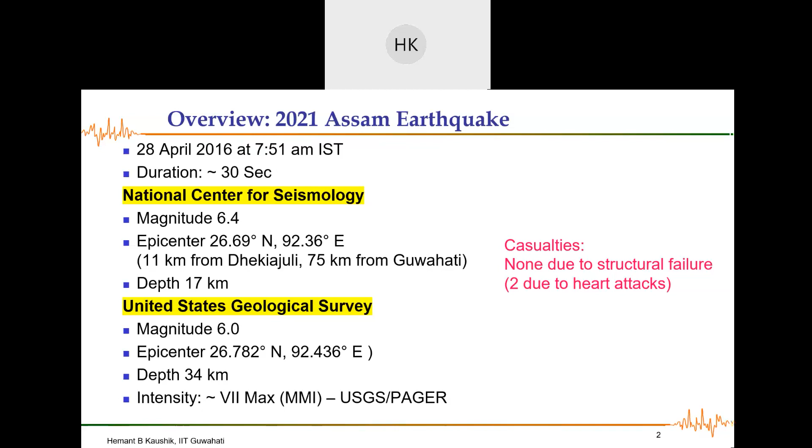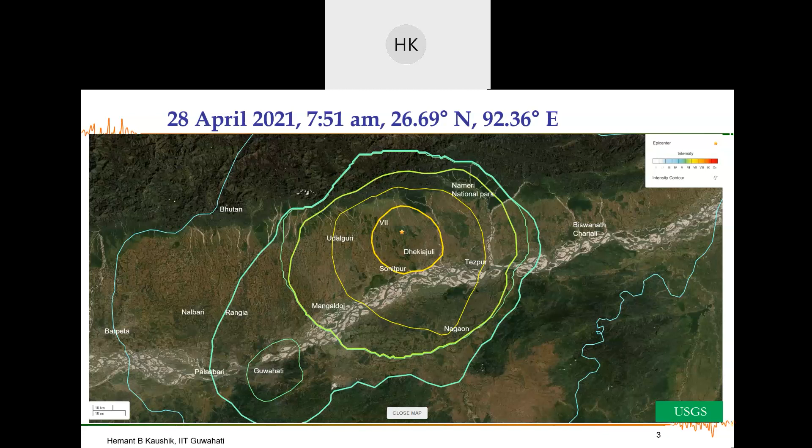All of you know that when you go towards the epicenter, the intensity increases. That means the expected damage increases as we move towards the epicenter. This is a map given by the USGS. The earthquake was felt not only in India, but in the neighboring countries of Bangladesh, Bhutan, China, and Myanmar. And there are reports from all over these countries, even Nepal as well, that people felt the earthquake shaking. Not only the main earthquake, but also some of the bigger aftershocks.

So 13 aftershocks were felt in just the next 3 days. These aftershocks were all of magnitude 3.0 or more. I'm not counting the aftershocks having magnitude less than 3.0. And yesterday also there was an aftershock that was felt even in Guwahati. Out of these 13, two were of magnitude more than 4.0. And even during these aftershocks, people were frightened. So these are the epicentral locations for these aftershocks, spread all around the epicenter.

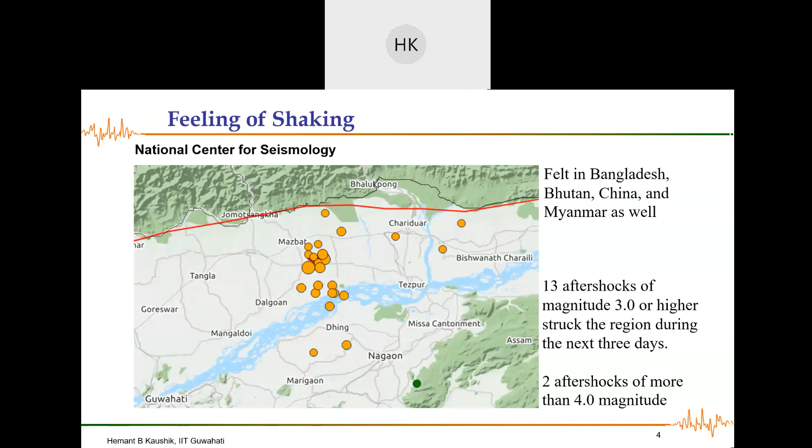Now, as soon as the main event struck, immediately we had two aftershocks. So the people who came out of their houses, some of them actually waited for a long time because of the shock, because of the fear. This is normal in case of big earthquakes of magnitude 6 and more, that we get so many aftershocks. In fact, some of the bigger earthquakes had even thousands of aftershocks after the main event. So this is quite normal. And we heard many stories, many news, many predictions that the day after tomorrow or tomorrow at this time we'll have a bigger earthquake. These are all rumors. We cannot predict earthquakes.

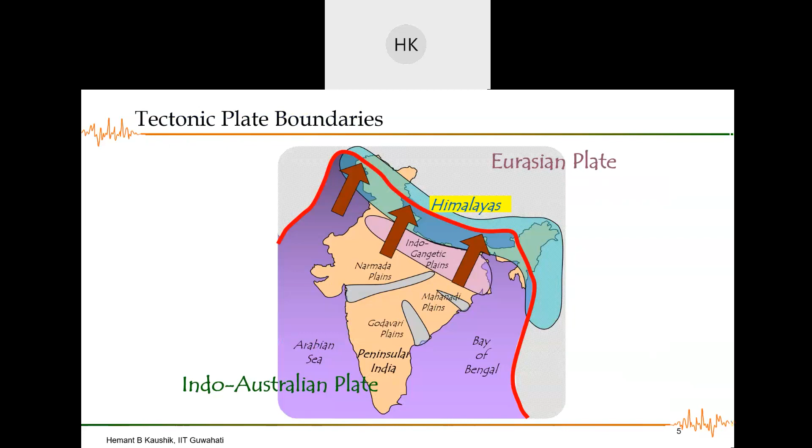We all know how and why these earthquakes are occurring. Our Indo-Australian plate is actually colliding with the Eurasian plate. Our plate is going down the Eurasian plate, and that's why we have the Himalayas along our northeastern boundary. And because of this subduction zone, there are many faults, there are fissures, because of which we have a very complex geological scenario here, and this earthquake is one of them.

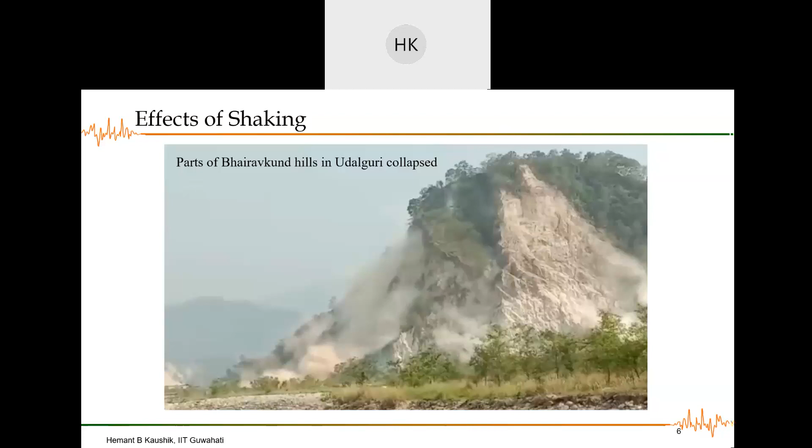What are the effects of shaking? Well, as far as the news reports are concerned, part of the Bhairavkund hills near Udalguri collapsed during the earthquake shaking. For me, this is the biggest damage that one could observe in this earthquake. Then there were big ground cracks and liquefaction near the epicentral region. Again, this is also a significant geotechnical issue that needs to be addressed. It has to be studied why such huge ground cracks occurred there, why liquefaction.

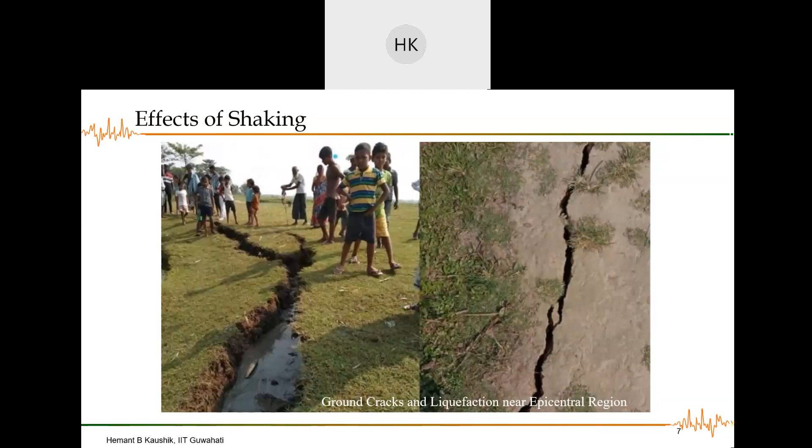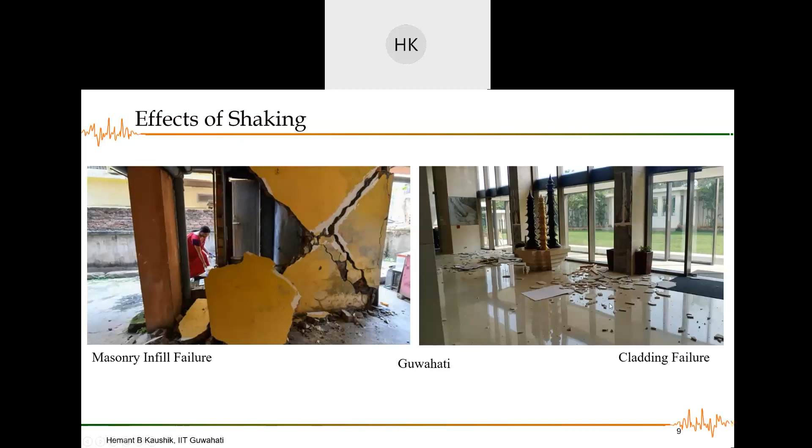Now, this building is about 40 to 45 kilometers from the epicenter. Not very far, but still, it is not in the mesoseismal region of highest expected damage. Then the other damages from this earthquake: you can see here the masonry infill walls failing, the huge crack in the infill wall, and then finally it collapsed in the out-of-plane direction. Then the famous hotel, all of you know these pictures, the cladding failed. So these are all non-structural damages. These are not my photographs; I've taken them from the news media.

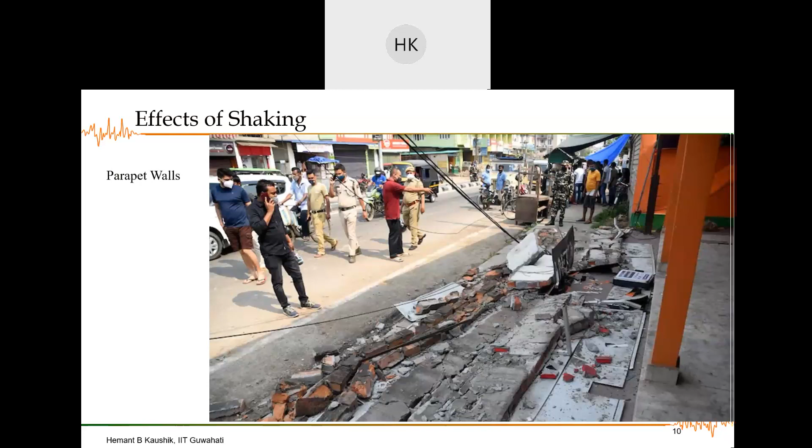The parapet walls, boundary walls, again masonry walls that fail in the out-of-plane direction. It is not very difficult actually to prevent such failure, but somehow the engineering judgment required to protect these walls was not there.

Masonry infill failure is a very common, much expected failure in any earthquake, even of smaller magnitude. The reason is very simple: these earthquake waves are basically energy waves, and this energy has to be transmitted, has to be dissipated somewhere. So these masonry infill walls dissipate the energy.

And if we can construct our reinforced concrete members properly, such that this damage in masonry does not result in damage in RC columns and beams, then we are safe. Then we are successful in our design. Now it is only a question of whether we are doing this correctly.

So this is a long wall, you can see, a masonry infill wall. And obviously in long walls, we always see such kind of shear failure. X types of cracks are very commonly observed. So here also, same building, you have the X cracking in the masonry infill wall.

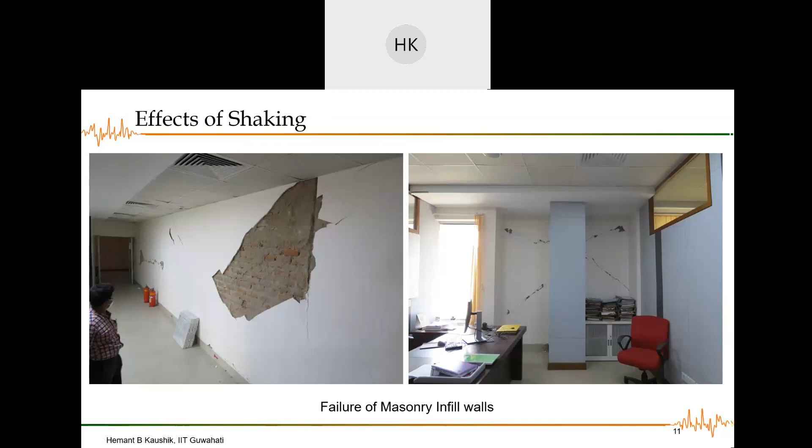Again, a long wall. And what you can see here is that there is a thick plaster on the walls. And not only the plaster, but above this plaster, there was a plaster of Paris. So we are actually trying to showcase as if the construction is really nice, the finishing is really top class, but what actually matters is not the top finishing, but the structure itself.

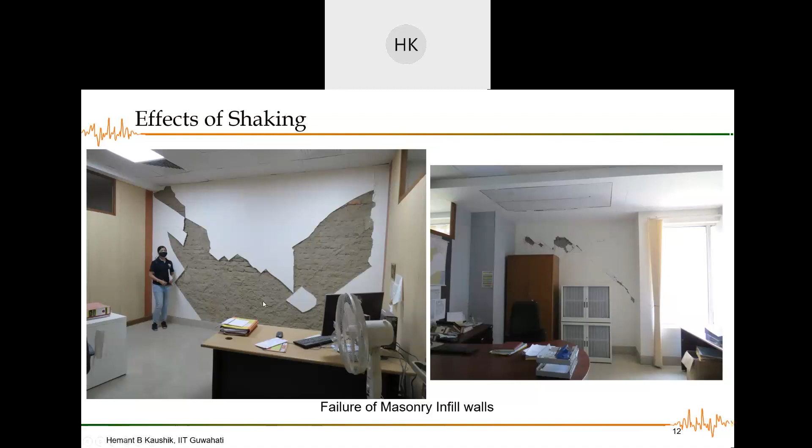So this is not a serious failure, but what I'm showing you is what kind of failure was there during the earthquake. These are all easily repairable. Again, the failure of masonry infill wall. So you can see how the energy is actually dissipated by these infill walls. So if properly constructed, if we can avoid the out-of-plane failure, if we can avoid such big removal of the plaster, then we can actually save the buildings.

Collapse of the false ceilings is another commonly observed failure during this earthquake. Hundreds of buildings, I could get reports that such false ceilings have failed. The primary reason was the construction was not proper. This was not a big earthquake where we expect such kind of false ceiling failure, but because of certain minor issues, the ties connecting these claddings to the ceiling were not proper. So this issue can be handled very easily.

Now, though it may appear to be a non-structural failure, just imagine the whole false ceiling falling down and someone is working in the cubicle here. Luckily, it was 7:51 in the morning. No one was working here, but otherwise you could have big damage.

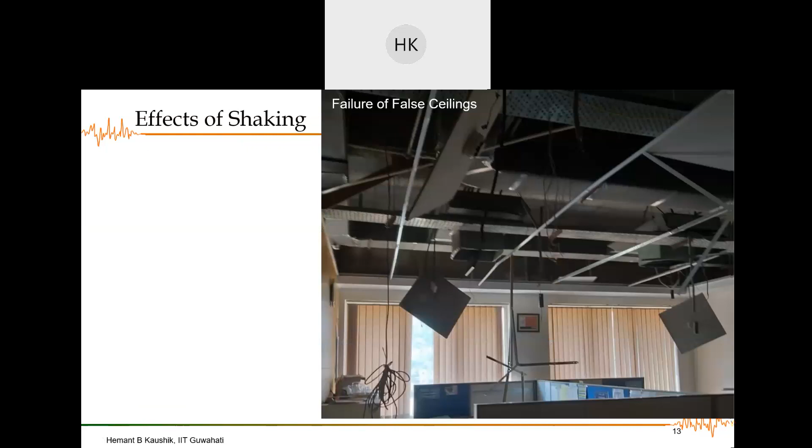Look at this non-structural damage. Now, was it so difficult to avoid? Can't we provide a suitable arrangement for this water purifier here such that it does not fall down? So this is what I'm mentioning. These are the damages that we can actually very easily avoid.

One interesting aspect is that during this earthquake, most of the reported damage was in reinforced concrete buildings. I have not read any news. Nobody has informed me that any damage has occurred to any other structure than the reinforced concrete buildings.

So there are certain questions that come to my mind. Are we designing and detailing these RC buildings properly? Are we providing masonry infill walls properly? Are we using the design codes properly? So these are some of the questions that our young generation have to think about before actually designing and constructing any buildings.

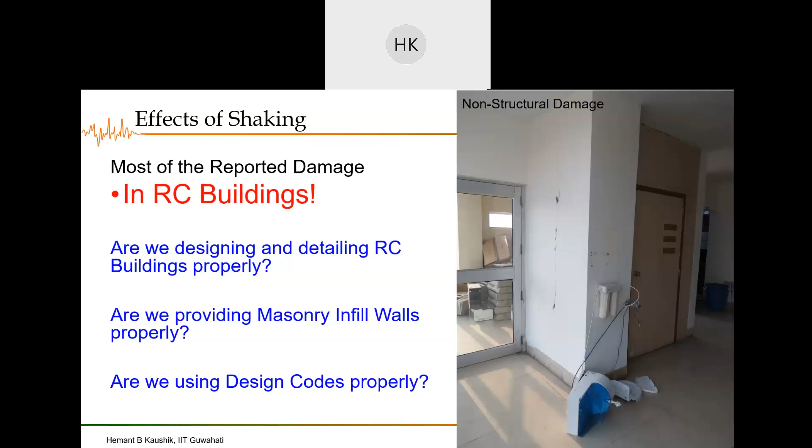So finally, there is a significant geotechnical issue that we have seen. There are huge ground cracks, the hills failing, liquefaction. So these issues are more in this present earthquake. Now, most of the reported damage is non-structural. The parapet walls, the boundary walls, false ceilings, these are non-structural, but that does not mean that they may not result in casualties. They can. We were lucky this time that the timing was such that there was no casualty.

Another major issue with such non-structural damage is that this takes a toll on the economy of the system. For example, some of the big buildings that I visited after the earthquake were shut because of such non-structural damages. People were not ready to go inside, and how can they when the whole false ceilings have fallen down?

So it takes a toll on economy. Even though there was no casualty, there was huge economic loss to many businesses. There was major damage to masonry infill walls, and minor cracking reported in some reinforced concrete members. Initially, there were reports of huge damage to reinforced concrete members in some buildings, but later it was clear that the damage was actually not in the concrete of these members, but in the plaster. Still, there was some minor cracking reported.

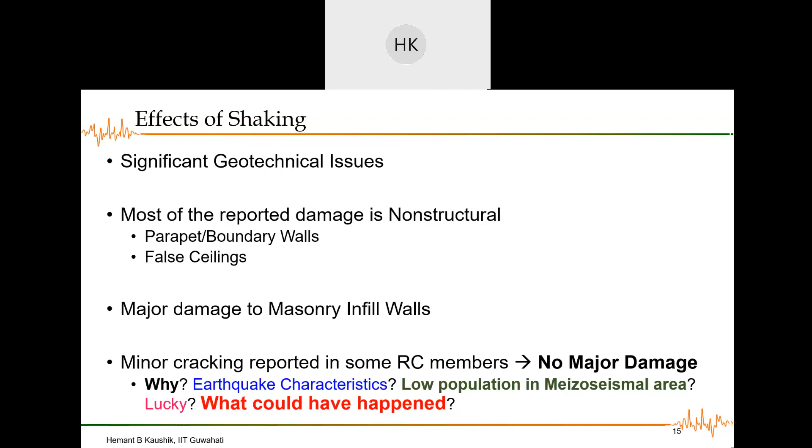Before that, we all know that the seismic hazard is maximum in this region. The entire Northeast comes under high seismic hazard, as per IS 1893:2016. Now, the maximum expected intensity in this region is 9 or more, so we have to design our structures for this intensity. And you can imagine what will happen when a big earthquake occurs, given that we are not even able to design properly for the smaller earthquakes.

Frequent earthquakes are expected in Assam, and we have been witnessing these smaller earthquakes. The smaller the earthquake, the higher the frequency; a bigger earthquake will have, of course, lesser frequency. So we expect bigger earthquakes, but not so frequently. This was one of those bigger ones, but as we discussed, there were certain reasons why the damage was not much.

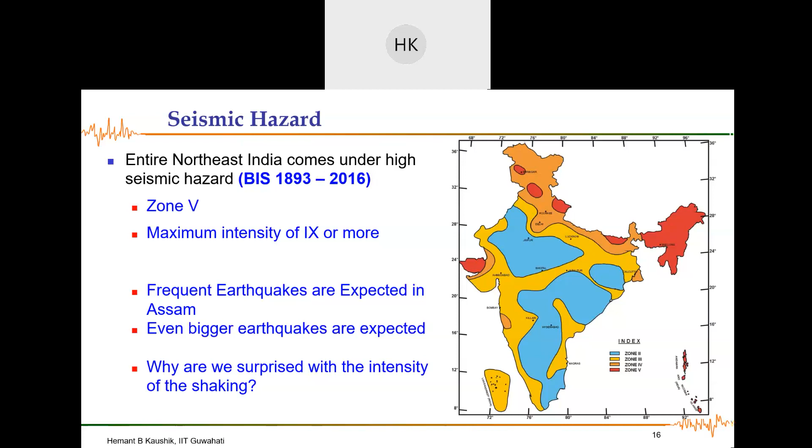Now, I'm surprised that people are surprised with the intensity of the shaking, but we should not be surprised, because this is expected in this region. So here we'll discuss what happened in the past, where we are in the present, and where we are moving towards.

Interestingly, more than 80% of the building stock in India presently consists of unreinforced masonry buildings. So when people say that we have reinforced concrete high-rise structures, we are only talking about maybe 10% or 15% of the structures in India - that's all. Most of our structures are unreinforced masonry buildings, 80% and more. So we are talking about semi-urban and rural areas here, where most of our population stays.

We somehow have a habit of using masonry in our structures. Show me a structure in India in which masonry is not used, and I'll be surprised. Why? Because it's easily available, it's economical, and it has many other advantages - it is strong, and it has good sound and heat insulation. So we can very easily use it in a variety of manners. That's why properly built masonry buildings have been performing well for several decades, but those masons are not here nowadays - now the kind of masonry buildings we are constructing are very poor.

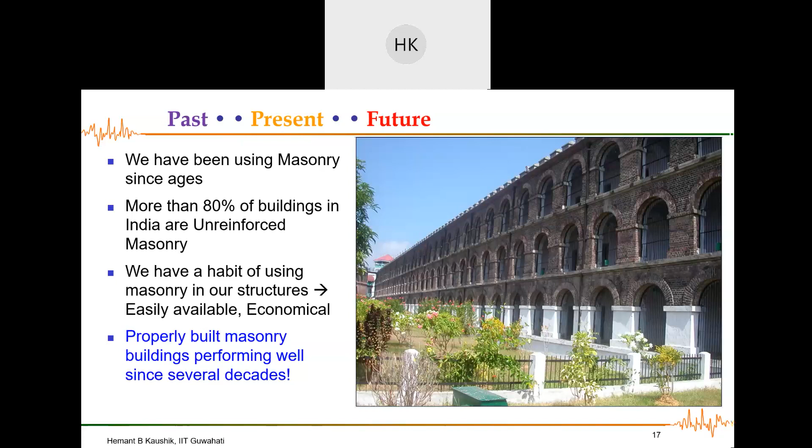Now where are we presently? We recently have developed an obsession with reinforced concrete buildings. Somehow all of us want to live in reinforced concrete buildings, right? And then, like I already said, we have a habit of using masonry. Then we use poor material to save some money. We don't use our design codes. So finally, what we get is our very hybrid type of irregular structures.

So this poor Superman here is trying to actually prevent the failure of these open ground story buildings. Earthquakes don't kill people, but unsafe buildings can kill people. So this is what is meant by here.

So these irregular structures are responsible for very high seismic risk in the region. And you can see so many irregular structures here. This photograph shows a very similar type of failure. The type of failure that the Superman is trying to avoid is shown in this photograph.

This is from Turkey, 1999 earthquake.

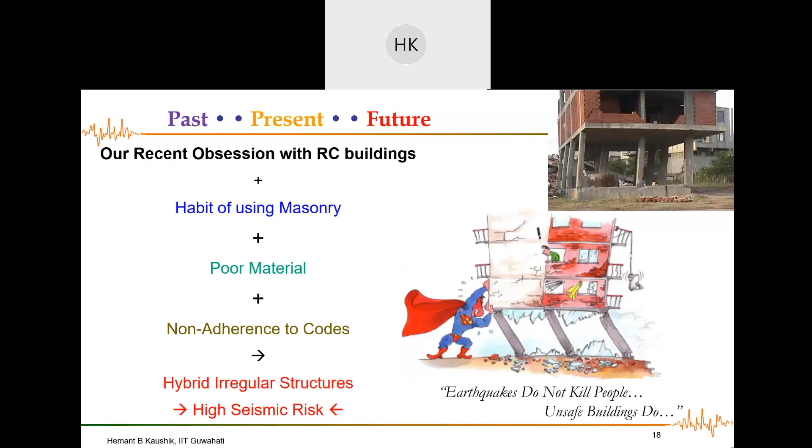So what do we do? Before we can even try and think what to do, let me tell you that we are not even able to design, detail and construct simple regular reinforced concrete buildings properly.

Now look at these examples here. Is this the way we construct reinforced concrete beams and columns? This is a recently constructed building, and you can see what I don't know whether you can call it honeycombing, because I don't see concrete at all.

Then you see here, these walls actually, before failure, have damaged the columns. So simple location of openings actually could have reduced this type of damage.

Look at this intermediate failure of this floor. Otherwise, the building is standing properly. So what to do with this building? There's no other choice but to dismantle this. So you can see here dismantling activity already going on, and the material debris is falling here.

Look at this building - regular building, not very tall, no open ground story, but it collapsed. So this is what I'm saying, that we are not actually designing our reinforced concrete buildings properly. We are not detailing them properly.

Can you see here in this building, in this 600 mm, there is no stirrup, right? And all of us know that this is the region where we expect the plastic hinge to develop during the earthquake, where we expect some damage. And there is no stirrup here, there is no shear reinforcement.

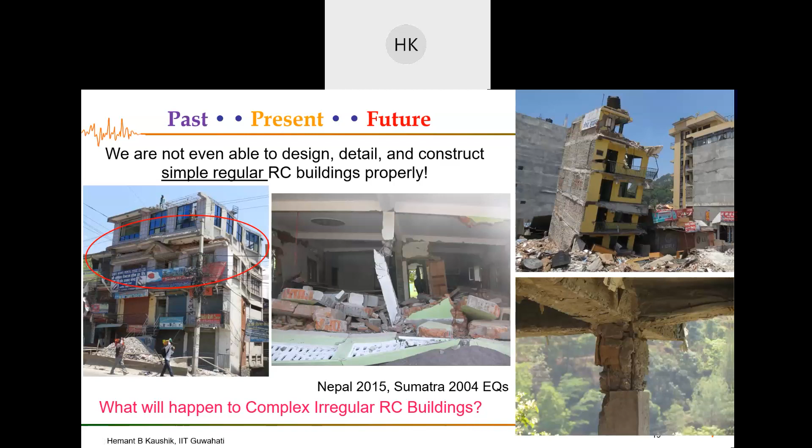Now, if this is the status of regular buildings, what will happen to the complex, irregular reinforced concrete buildings? Because all of us love complexity, all of us love irregularities. Let us see what happens.

So the biggest problem in Indian cities, in urban cities in India, are the open ground story buildings. This is the vertical irregularity that comes because of absence of the masonry infill walls in the ground floor. So if I apply a lateral load at the top of this building, you can see there are two parts to this building. The left part has open ground story building. The right part does not.

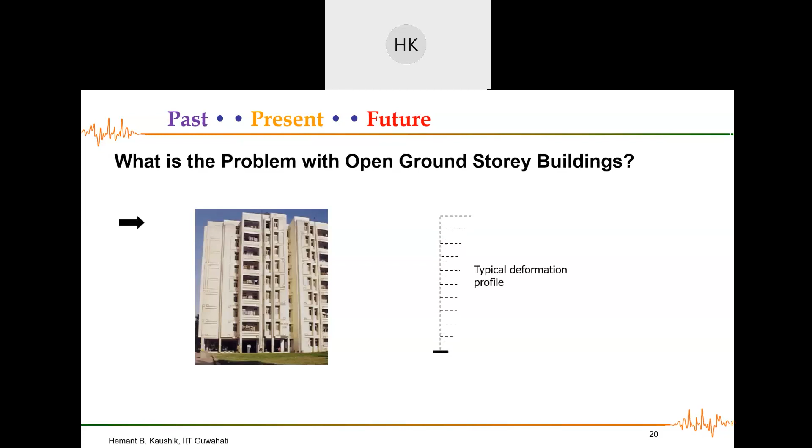Now let us see how this building is going to deform because of application of this lateral loading. So these are all the floors of this building, and I'll show you how typical deformation will be visible when I remove the masonry infill walls entirely. So now I'm assuming there is no infill wall anywhere along the height of the building. In that case, if I apply this lateral load at the top, I will get a very beautifully well distributed lateral deformation along the height of the building. So this is the bare frame.

So you can see here, if I take this displacement, relative displacement between these two points versus relative displacement between these two points, the inter-story drift ratio is more or less constant from top to bottom. And this is how our building should behave.

Now, if I consider this right-hand side building where the infill walls are there in all the stories, this is fully infill frame. And obviously, because of presence of these infill walls, you will find that the deformations will reduce, right? So from this point, it has reduced to this point.

And even then, the vertical deformation profile is quite regular. So the inter-story drift ratio, again, they're more or less similar when you go from bottom to top.

Now, a very interesting feature of this open ground story or open first story frame. So this building, the real building here, you can see that most of the lateral deformation is actually accumulated in the ground floor itself. The upper stories are not deforming much. They are more or less constant, slight deformation. But look at this deformation here.

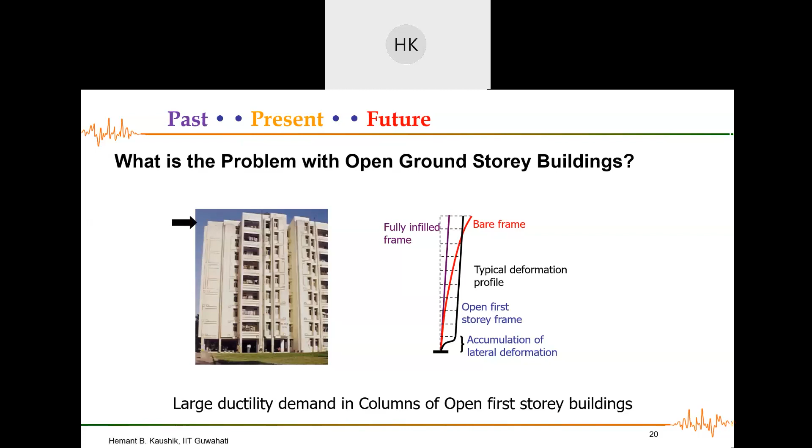And because of this problem, in every earthquake that has occurred in India in the last 25 years, such buildings have collapsed. So I'm showing you photographs from 1997 here. I heard this news, I did not visit this area, but then I heard the news. The team from IIT Kanpur visited, and when I joined my PhD in IIT Kanpur, I got this photograph. So 22 May 1997, a small earthquake of 5.7 magnitude, and we have this kind of open ground story failure.

2001 Bhuj earthquake, this is a famous photograph. All of you know about this building. It's 5-story, but now only 4 stories are visible. The open ground story has gone.

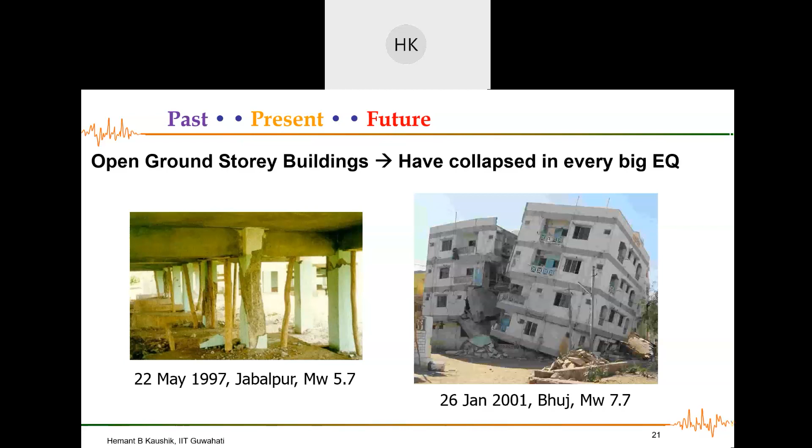2004 Sumatra earthquake. This building is only 2-story, right? And you can even see the car here. So the parking space which was constructed for this car, neither the car can be used nor the parking space now. And look at the building, look at the quality of concrete. Only a 2-story building and completely collapsed. This building was about 1,000 to 1,100 kilometers away from the epicenter. The epicenter was in Indonesia, Sumatra. But the earthquake was so big, 9.1, that the buildings have collapsed in Port Blair.

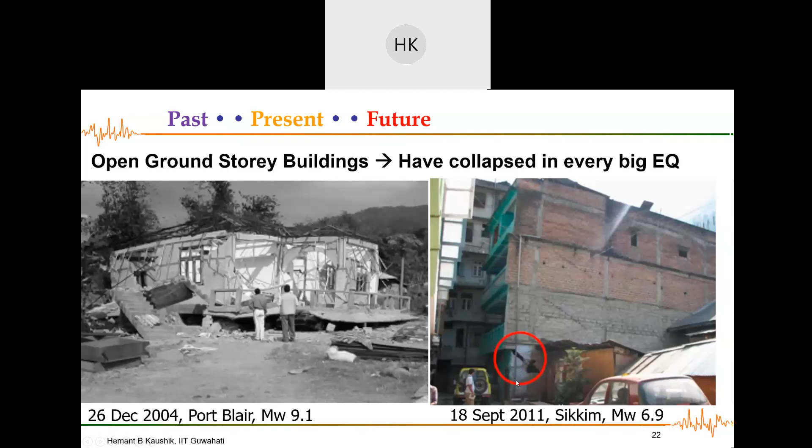2011 Sikkim earthquake. It was again a big earthquake, 6.9 magnitude, and you can see open ground story building failure here. So there were several such columns which have failed, but the complete failure of these buildings was avoided.

2015 Nepal earthquake, again a big earthquake, 7.8. So this building collapsed. Now, though it is an open ground story building, that was not the only reason why this building collapsed. There were other reasons because of soil subsidence, because of the sloping ground. So there were many problems here.

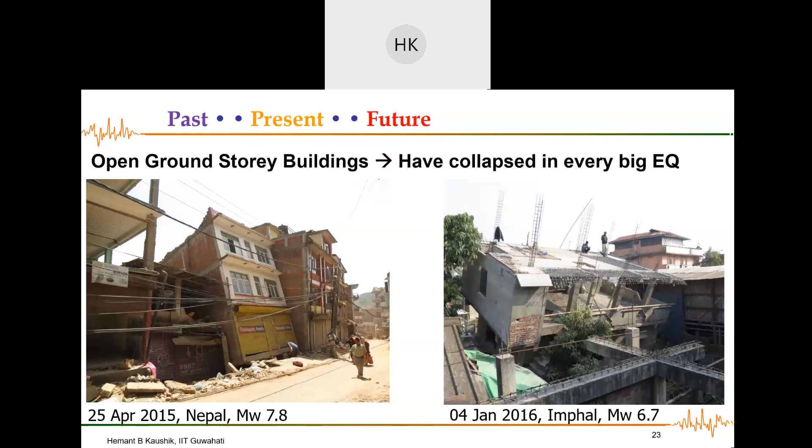2016 Imphal earthquake. This was not even a completely open ground story building. It was a partially open ground story building. And you can see when such failures occur, there is no other way to retrofit or to strengthen this building. You have to dismantle it. You have to completely remove the building. And this dismantling will take a lot of time, effort, and money.

Now in Assam, we have thousands of open ground story buildings, and there were reports that from about 15 to 20 buildings, some damage was there in these buildings in Guwahati city, only Guwahati city I'm talking about. But some engineers, the Assam State Disaster Management Authority, and some local engineers, they have actually tried to improve the size of the columns by jacketing. But I have myself not seen those columns, I've only heard about them.

Now, these are some of the common problems that we can think of. So first, it is the irregularities in the structure. Most importantly, the vertical irregularities, the open ground story buildings, but also the horizontal irregularity, the irregularities in the plan related to torsion. Those are also very severe.

Non-involvement of engineers, this is a big problem in India, not only in this part of our country, but everywhere. I can cite you one very interesting story of my PhD student whose parents were constructing a house in Guwahati city. And then when this student started giving them advice about ductile detailing, about the sizes of the columns, they started not discussing the issue with the student, right?

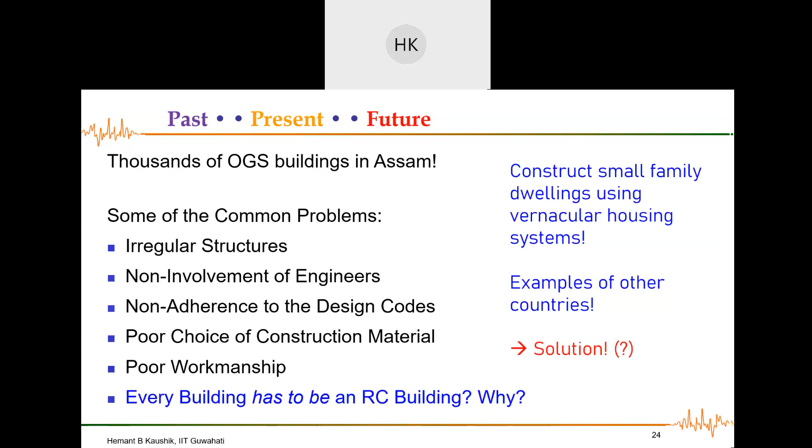In California, which has some of the highest seismicity in the world, you will not find a single family house constructed of reinforced concrete or even structural steel. Almost all houses in these seismically prone areas are wooden houses. In Japan and New Zealand too, you will find most houses that individual families build are not reinforced concrete.

So are these the solution to these problems? Let us see. Because of limited time, I will shortly discuss two vernacular housing systems. The first you already know - it's such a famous typology, not only in Assam but in the entire world. People really appreciate the kind of connections used in these houses, and the type of material used in these houses. I'll show you some details later.

Before that, when I joined IIT Guwahati, I started working on a project, and with the help of my MTech student, I wrote a very simple World Housing Encyclopedia report on these Assam type houses. You'll be surprised to know that this report has been downloaded by about 10,000 people in the entire world, which is surprising because people are still interested in learning how different vernacular housing systems are constructed in seismically active regions. But somehow we have forgotten such buildings.

We have moved from these buildings to other types of structures because of our obsession with other materials. There's no problem with that - we can be obsessed with some material, we can move to some other material, but then we also have to learn how to use that material properly, how to design them. We are not somehow doing that. The second type of houses we will discuss today is confined masonry houses. Some of you may already know what confined masonry houses are, but for those who don't, we will discuss it in brief.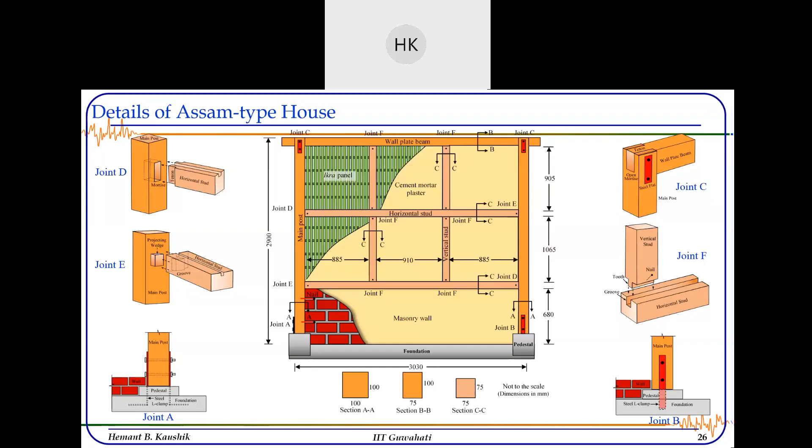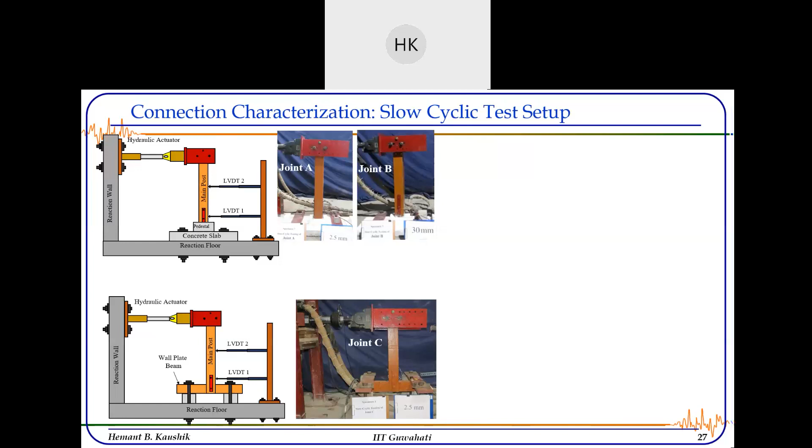So we carried out a lot of tests on these individual joints, all joints A, B, C, D, E, F. Every joint we tested, every member we tested, and then we also tested the whole house of this Assam type building. This is a single story, single room house which was constructed over the shake table at IIT Guwahati. In a single day we applied about 112 ground motions on this house specimen, and you will be surprised to know that even after application of these 112 ground motions, there was no damage at all to this house.

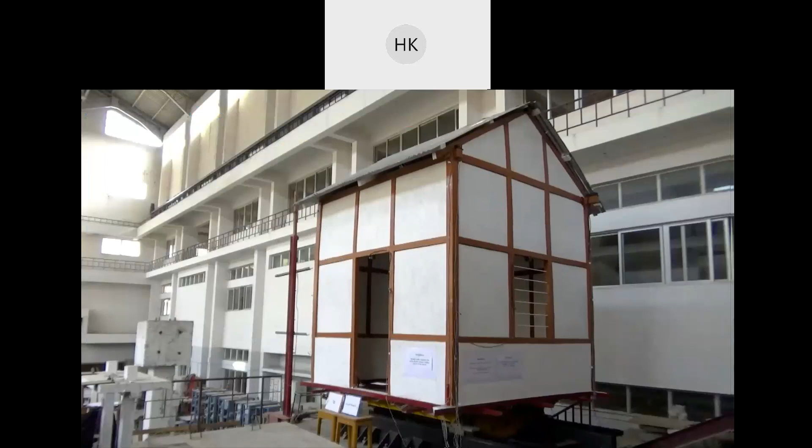I hope this video works here. Let me see. Yeah, so this is the Taft ground motion, the peak ground acceleration was about 1 g. You can see it's not a very small earthquake, peak ground acceleration of 1 g is a big earthquake. Some people say that the peak ground acceleration of the 28 April earthquake in Assam was about 0.1 to 0.15 g only, so this was about 10 times higher.

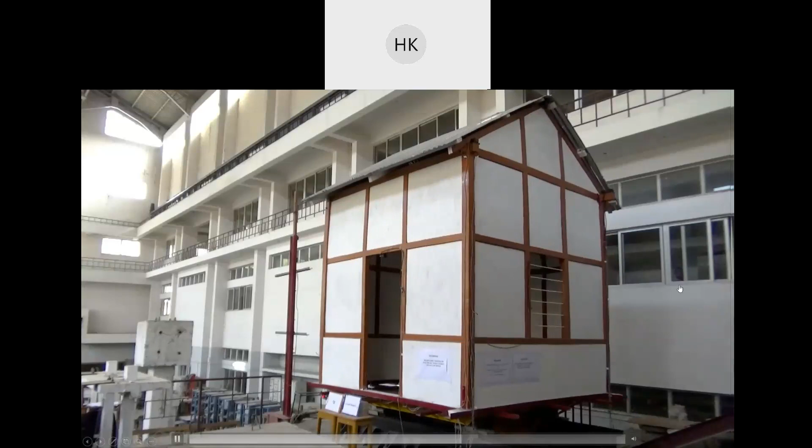And the student who did the test is standing here, Biswajit Chand. He has completed his PhD on this topic. Now even after subjected to this big earthquake, you cannot see any damage here, right? And why should I show you this video? Because you all have seen these Assam type houses since so many years, and you know that there is no damage to these houses even during big earthquakes, right?

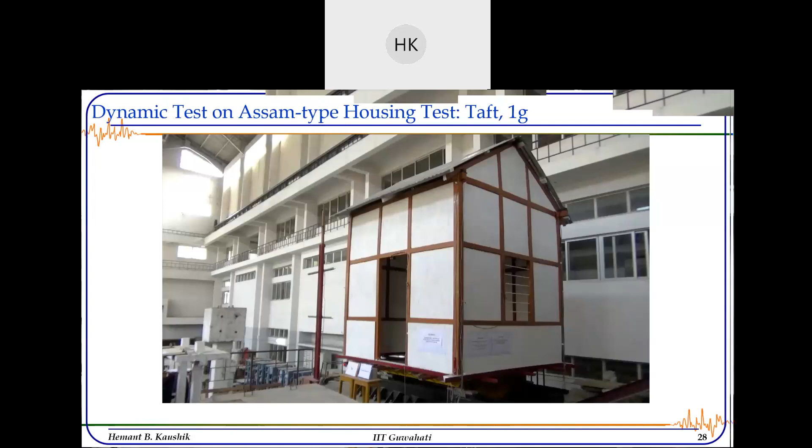So this is just one shaking that I'm showing you. We applied 112 such shakings, and we could not fail this house. So what we decided at that time, the student was really disappointed because he wanted to fail the structure.

So what we decided then, we will push this structure and pull this structure on a different test setup and try to fail it. So this is another setup where the same house we shifted at IIT Guwahati lab, and then just see here we are applying the push and pull load. This was applied by about 250 plus minus displacement.

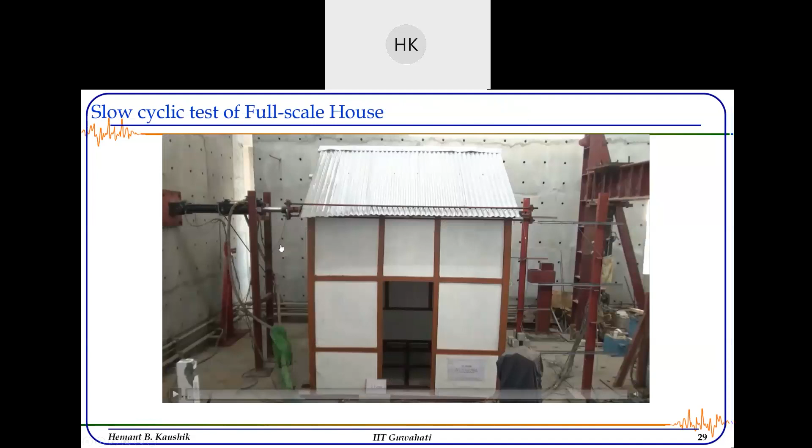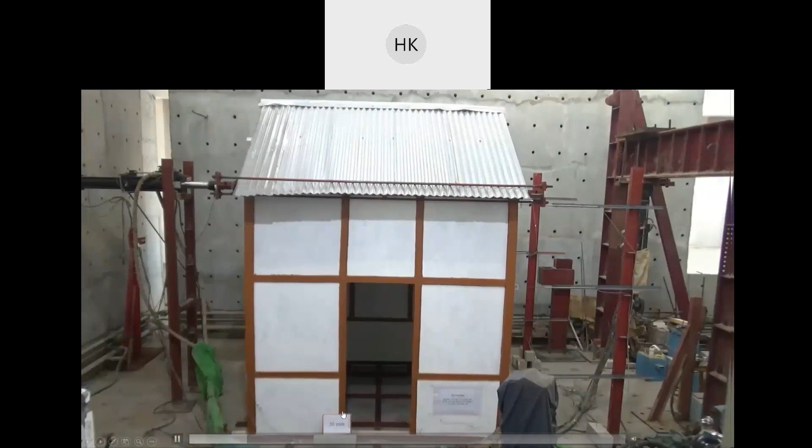So you can see what happens to these joints here, these are all flexible, right? And you can see here the displacement that we have applied at the top, we have already applied about 30 mm displacement. This test is I'm showing you in a very fast forward manner, not real time, because real time taken during the test was about 2.5 to 3 hours, but I'm showing you it in about a minute.

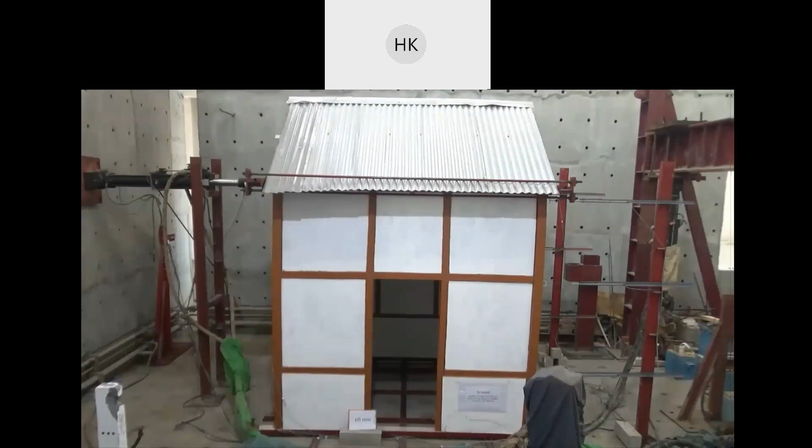So this is about 85 mm, which is huge actually, and you can see the separation of these ekra panels from the surrounding frame. You can see here the separation of this joint. Every joint actually is so flexible that it is simply separating, but then it is also going back there.

We have already reached 150 mm plus minus displacement here, which is again very huge displacement. You can see here now slightly the ekra panels, the bamboo shoots inside this plaster, and you can see the groove and wedge arrangement here, which is separating but again joining. We reached 220 mm, and remember such kind of displacements are not seen during earthquakes. So 240, 250 mm displacement, and we could not fail the structure.

So then we removed such kind of arrangement. We provided another arrangement in which we pushed this structure on a single side by about 500 mm. We did not pull it, we simply kept on pushing it. Then we could actually fail some of the walls. So 500 mm displacement is not less for a single story structure.

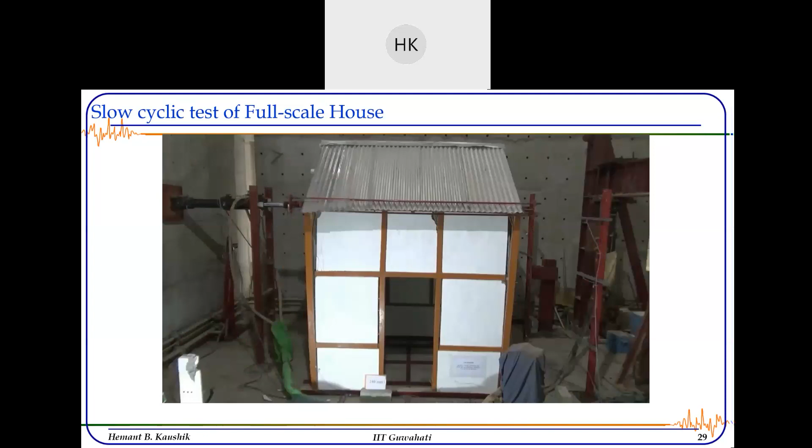Right. So all of us have seen such beautiful behavior and performance of Assam type houses. Let us see some of the behavior of these confined masonry houses. But before that, for those of you who don't understand what confined masonry is, here is the difference. There is a difference in the construction process.

So in confined masonry, we construct the walls first. So there's a foundation, and then we construct the wall. After that, we construct these tie columns and the tie beams. In reinforced concrete, we construct the RC frame first, and then the infill walls. The load transfer arrangement is different. We'll discuss this; the structural system becomes completely different, and there is a lot of saving in the cost if we are doing confined masonry.

Now, you look here, if we have the reinforced concrete frame with infill wall, this masonry wall is not designed to carry the vertical load, and we don't bother whether it carries lateral earthquake load or not. So the only reason this infill wall is there is to fill this gap. Otherwise, it has no structural design. It has no meaning otherwise. So we are simply wasting this material.

And without knowing that, during the earthquake, this masonry wall actually resists a lot of load. And since we don't realize that, we don't design them properly. And that is the whole problem. On the other hand, if you consider the confined masonry wall here, we design this wall to resist all types of loads: the vertical load coming from the upper floors, the lateral load coming from the earthquake. So this wall is expected to resist all loads.

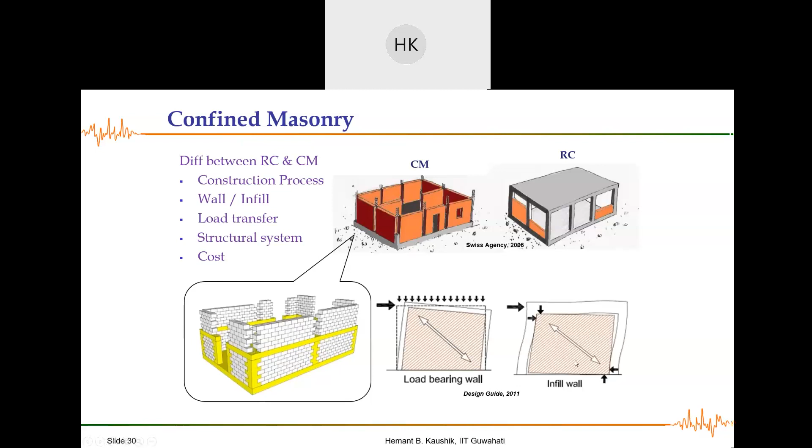So toothing means you can see here the individual layers of these bricks. So they are going inside. The concrete is going here into the wall, right? Such an arrangement increases the bond. Okay, so this is a very simplified system compared to the masonry infill RC frames, but the performance is comparable. And why is it comparable? Because we are using the materials to their capacity. We are wasting infill here, but we are not wasting here.

Let us see what we have done. We did a similar study like we did for Assam type housing. So this is how we construct these houses. I'm showing you this construction for a specimen with aspect ratio 2.0. So this is a very slender specimen. And you may argue, where do we find these slender walls? Well, like I said, the primary objective in confined masonry walls is to reduce the free span. So I'll show you some photographs where, because of the presence of walls and openings, you may have such slender wall specimens.

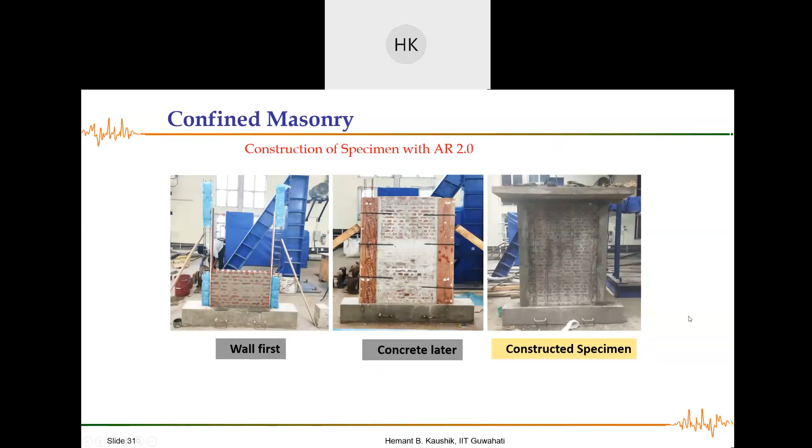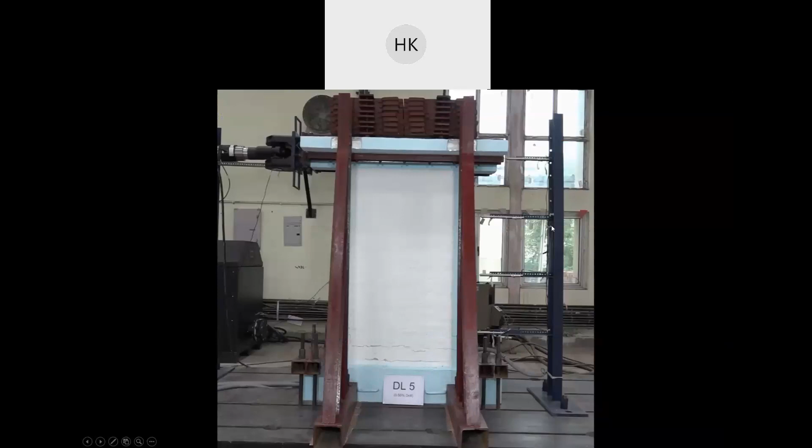So walls are constructed first. Concrete is poured in the tie columns and tie beams later. So this is the constructed specimen, and we did testing. Let me see if you can see the video here. This is a half scale specimen, a very similar arrangement where we apply the lateral displacement using these actuators. And here you can see the lateral drift that is being applied.

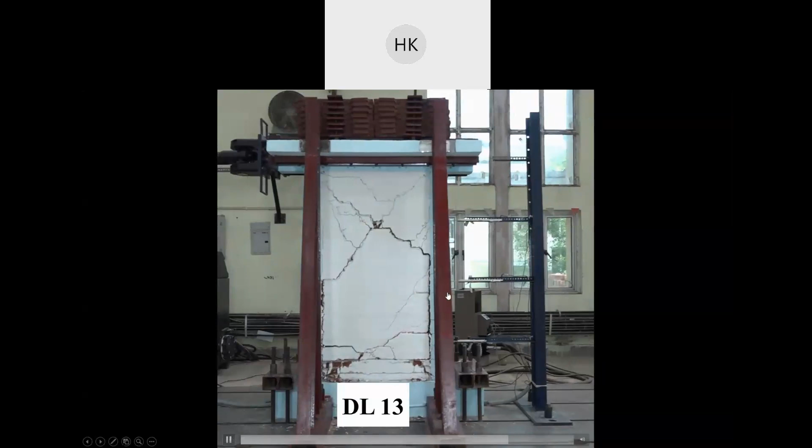And you can see how the cracks are forming in the masonry. And like we already discussed, these cracks actually form because of dissipation of the energy. Okay, so this is where, because of sliding, because of the interaction between the frame and the masonry, the energy is dissipated. So you can find at drift level 13 some failure in the masonry, failure in the tie columns as well.

Okay, so from a distance, it appeared to be a very similar construction like masonry infilled RC frame, but their behavior is completely different. Even their design is completely different. Here we design the masonry wall, but in case of RC frame with infill, we design the RC frame. And rather, I'll say we misdesign the RC frame. We don't do that properly. So that is why this system is coming up. So if you don't want to design the reinforced concrete properly, then let us design confined masonry. Let us construct confined masonry walls.

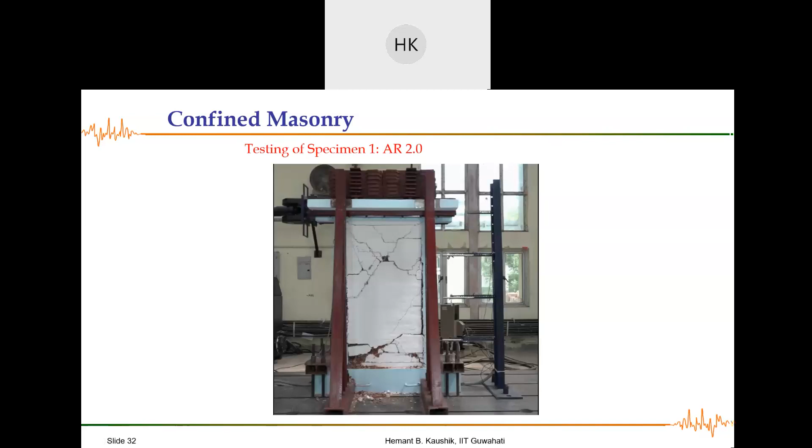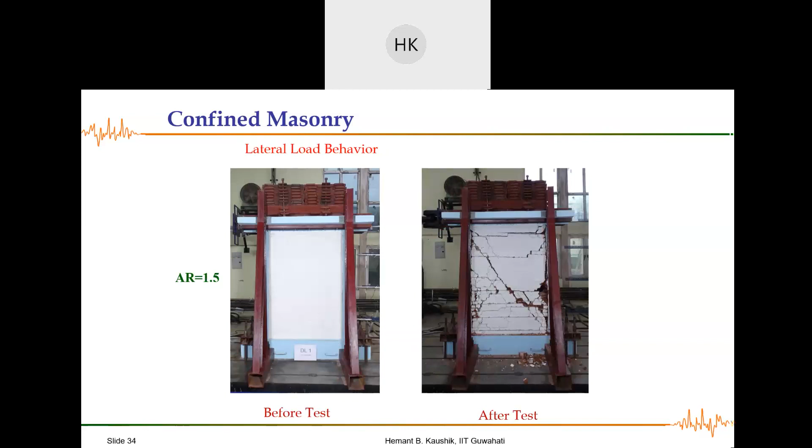Now, interestingly, this work was carried out by your own alumni. Bonisha Bora is a 2014 batch from Royal Global University. She is doing this work and she has almost completed her PhD now. Within a few months, she will be able to submit the thesis.

So the whole point of discussing all this is these are very simple systems and these have been proven to be performing really well during earthquakes in several countries. For example, Chile, in which big earthquakes are really common. There are thousands and millions of such buildings which have performed really well during the earthquake.

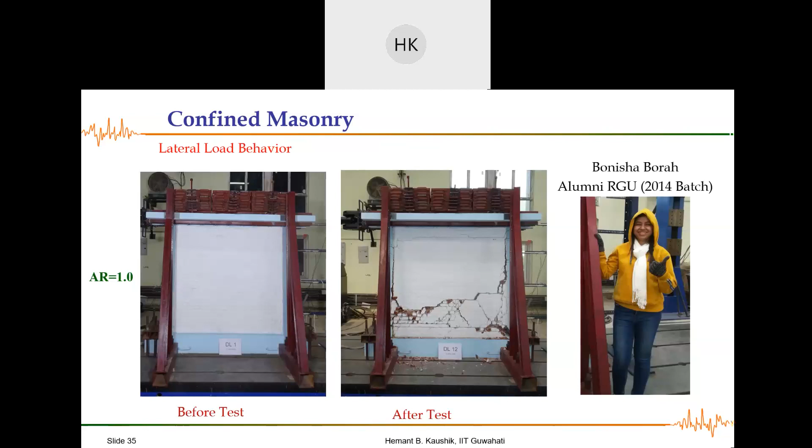In India, we construct these buildings, but without realizing that these are confined masonry. So some little things that we can do to improve the system, we are not doing. But once we realize that these are confined masonry buildings, we can actually improve the system. Fine, then I've shown you two solutions that we can adopt, at least for smaller buildings. So in summary,

the problems that we discussed are not specific to Assam only. But then this is not something that we should feel happy about. That it is like मैं तो अकेला नहीं मरूंगा, सबको लेके मरूंगा, right? So this is not something that we should be feeling happy about.

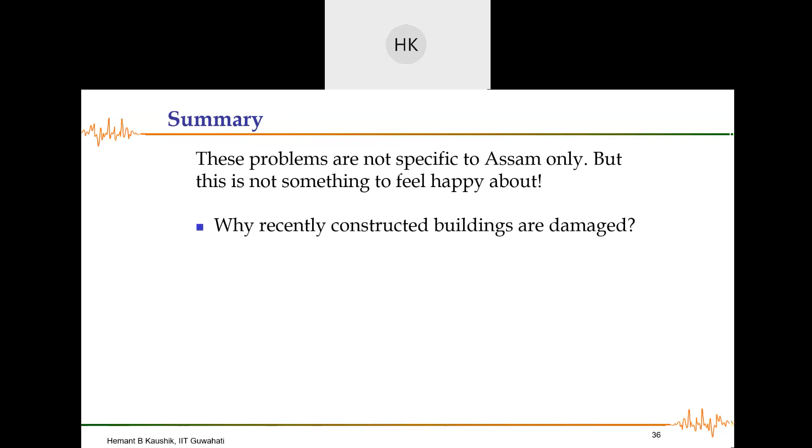The main question is why recently constructed buildings are damaged during earthquakes. And you will find hundreds of stories where people will say that old buildings are performing well, but the recent buildings are performing poorly. So of course, it has something to do with poor material, with poor workmanship, with poor labor, and with poor engineering judgment.

Look at this building. It was constructed in 2015, and within a few months, the Imphal earthquake struck, and these people had to demolish this building completely. It was a hostel building for the Sports Authority of India, and people were staying during the earthquake, 6.7 magnitude earthquake. So huge damage to this building. Of course, it could have been retrofitted, but then the government decided that they will dismantle it within a few months of construction.

Again, another open ground story, four-story building, Imphal. Immediately after construction, and you can see here that the construction was actually in progress in the top floor. But there was huge damage here to several columns during the earthquake shaking. And you can see what type of construction is there. So here you can find that this is the beam, these are the columns.

And because of some funny reasons, people actually make bigger rooms on the top because they think that here they can save some money, some FSI criteria, which I don't understand. And then when they go up, this area is further increased. You go up, this area is further increased. So as you go to the top, you have reverse pyramidal structures, right, which is very interesting. And you can see what type of opening is here, what type of opening is here, completely different. Here they constructed an opening without even understanding what can happen to this building.

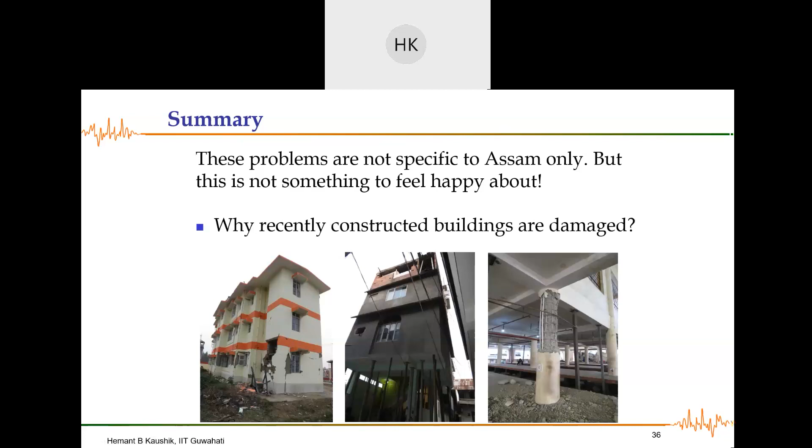A very simple market building, the famous Ima Keithel market in Imphal, and huge damage was suffered, and it was also a recently constructed building.

So why workmanship is so poor? Because we want to save money. Why seismic codes are not being followed? Because of course we want to save money, we want to save time. We don't have skilled people who can actually understand the codes.

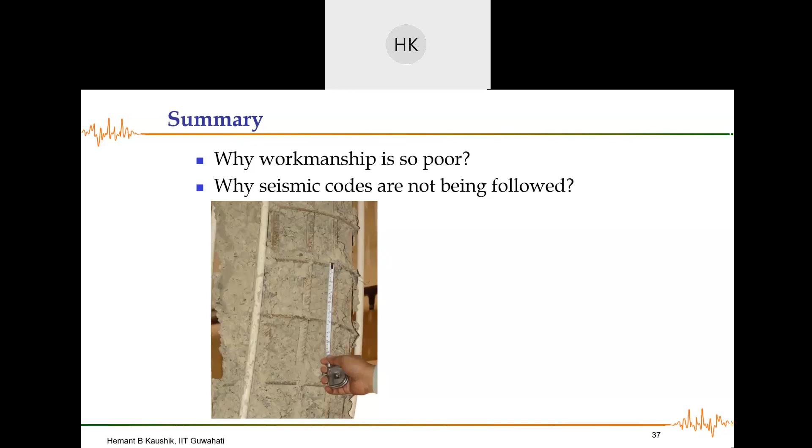And this is what we do then in seismically active areas, in seismic zone 5. If we are providing the spacing of the stirrups at about 150 mm, then we expect damage. There is no way we can prevent the damage. Look at the clear cover here, a clear cover of about 125 mm. Of course, there will be damage.

Then we have found some very great ideas that people use for having some scope of future construction. They leave such kind of bars, right? And you can imagine what will happen to these bars during change in the weather pattern. They all will be corroded in just one cycle of the weather.

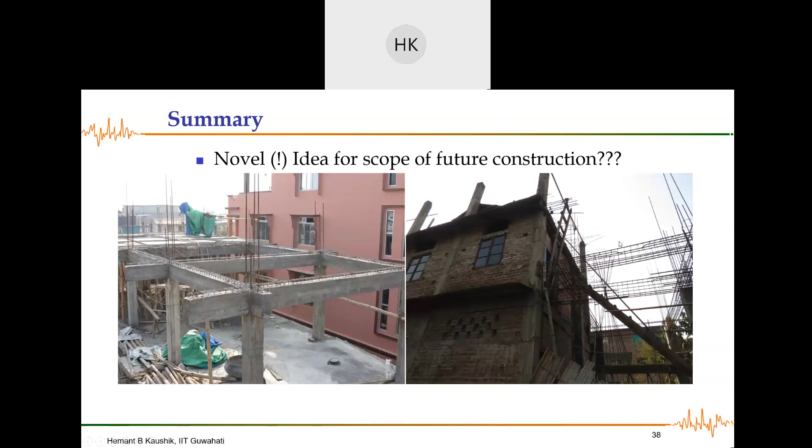And even greater ideas that they provide even the complete reinforcement detail bars, the cage, and they construct later. I'll show you this photograph here. This part of the building. What was done here is that this joint was not there originally. And it's very obvious because you can see the beam column joint is here.

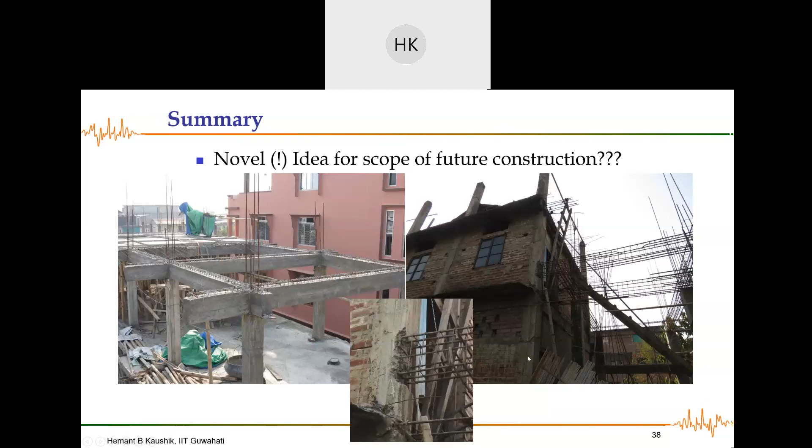But then the owner wanted this beam here. And the only way it can be done is by exposing the main bars of this column and then connecting these bars of this beam to these columns. What a great idea. And then they will say that their building has failed, has fallen during the earthquake. What else it can do?

When will the chalta hai attitude end? Then will our buildings be safer. How that will happen, I don't know. But then here is a very interesting example of how we are obsessed with beautification, with beautiful look of the structure. The drain water pipeline has been provided inside the column. You can see here, this is the PVC pipe which is provided inside the column.

So it is such an important idea to have good aesthetics, right? That we even are ready to sacrifice the quality of the construction, the strength of the structure. We don't bother about it, right? If you go to any developed country, you will not find any plaster, right? But here we are very fond of plaster because we can actually show that the construction is really polished because our real structure is not polished.

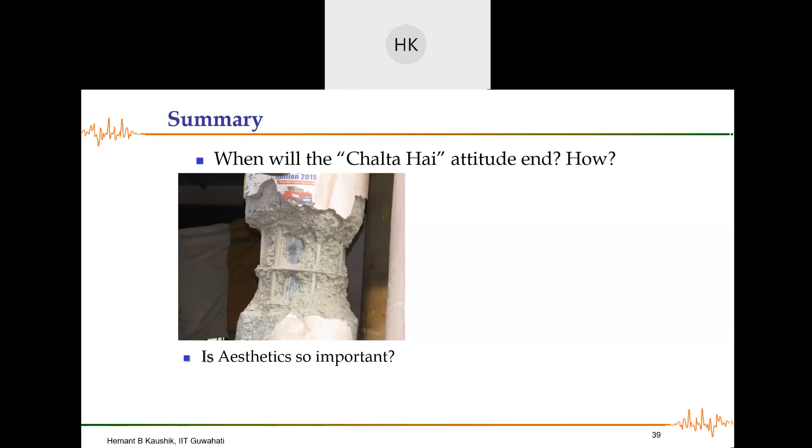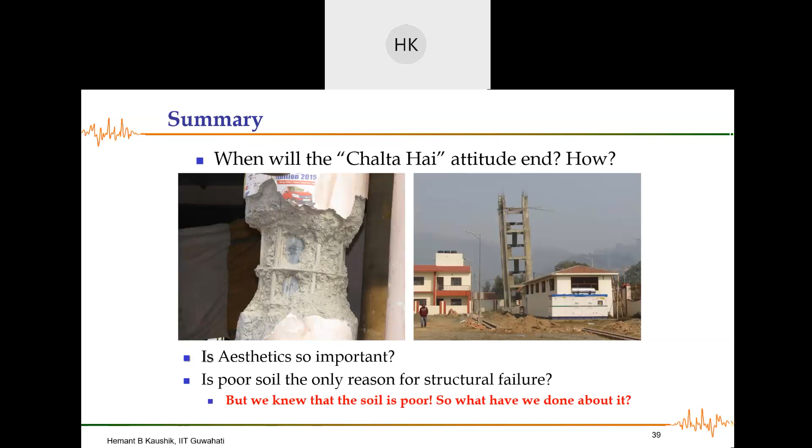The answer is no. It is not the poor soil that is only responsible. It is us, the structural engineers, the construction workers. The supervision was very poor. We knew that the soil is poor, so what did we do about it? Nothing.

Now, this is a very good example of this chalta hai attitude, of this engineering judgment that we sometimes don't use, of the design that we carried out, of the detailing we use. This is a very simple structure. This is a gate of a university in Imphal, right? And this gate has no load other than its own self weight. And look at it, how it has performed.

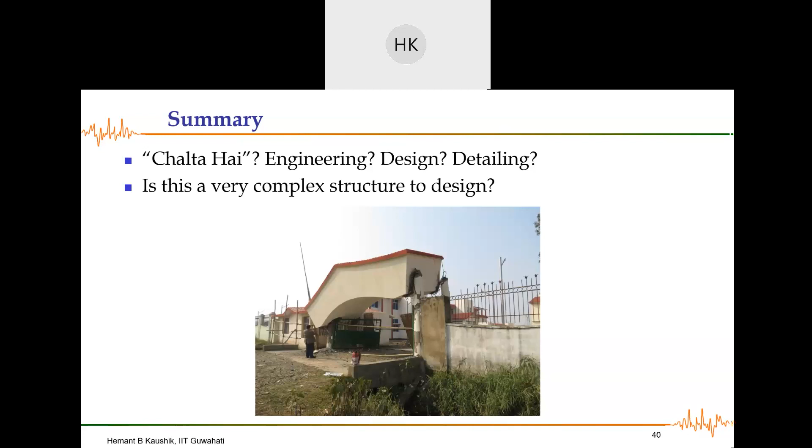This is not a very complex structure to design, but only because of our chalta hai attitude, such structures are failing. And we can now think of what will happen to the bigger structures. So this is the lesson that we learn.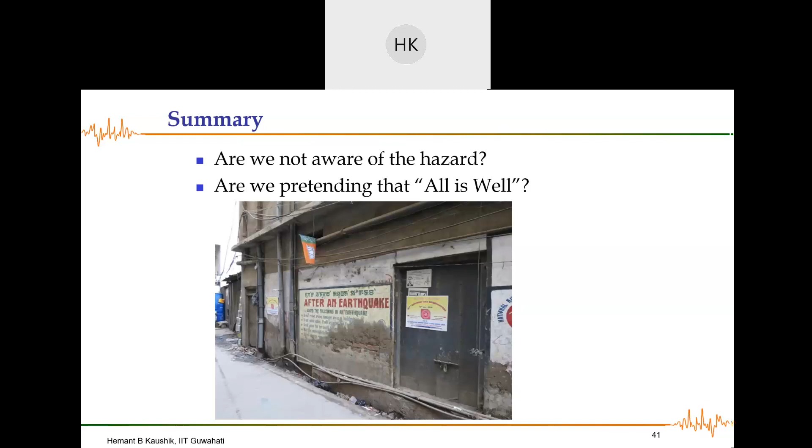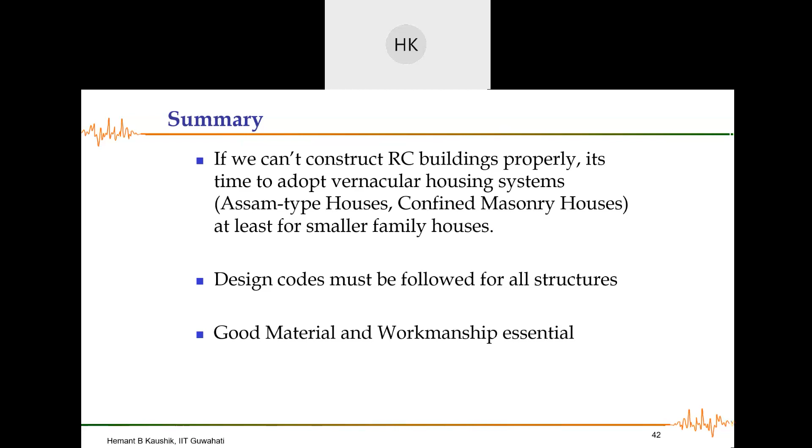So finally I would like to summarize here that if we can't construct these RC buildings properly, then I think it is time to adopt vernacular housing systems like Assam type houses, confined masonry houses, at least for smaller family dwellings, if not for bigger houses. Design codes are a must. Even if we go for these vernacular housing systems, we have to develop design codes for them. We cannot simply leave it to people to just construct as per their wish. Good material and workmanship, there's no alternative to that.

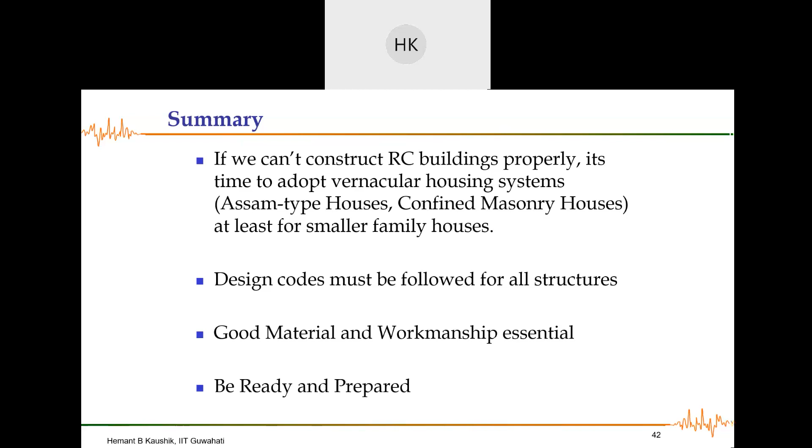And finally, we have to be ready and prepared for the next shaking. We cannot predict when it will happen, but what we know is that it is going to happen. So thank you very much for patiently listening to me, and with the hope for a better construction, I end my presentation here. I would be very happy to interact with you to answer any questions if you have. Thank you.